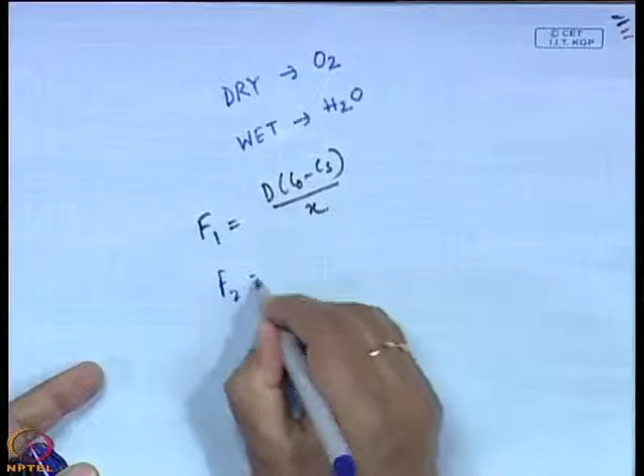So we find that F1 can be written as d times C0 minus Cs by x, and F2 can be written as K into Cs, where Cs is the concentration at the surface of the silicon. K is the surface reaction rate constant for oxidation.

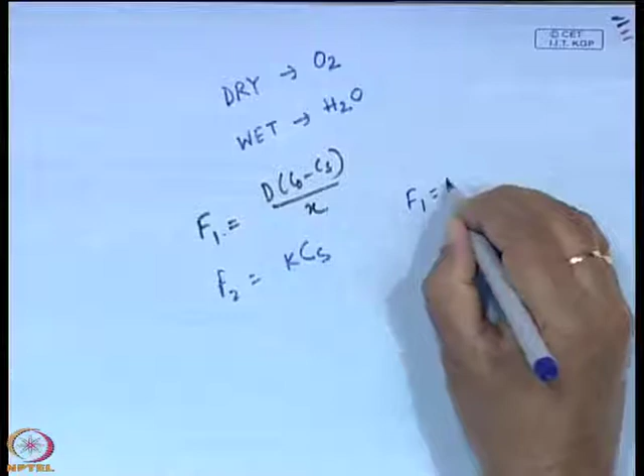At steady state, F1 and F2 will be equal, so F1 equals F2 equals F. If you equate these two equations and solve for Cs in terms of F, then F becomes d C0 by x plus d upon k.

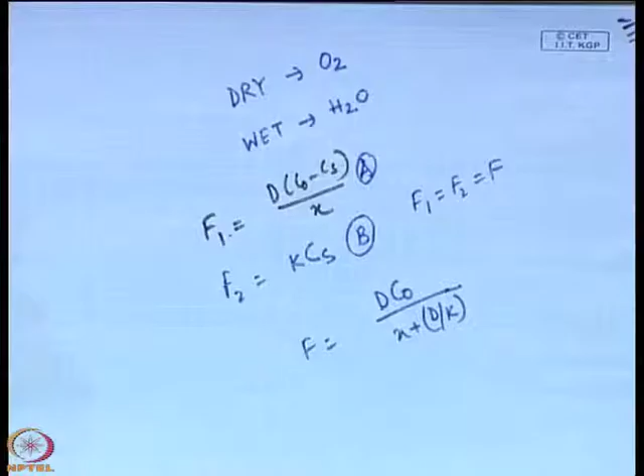So C0 is the initial surface concentration of the oxidizing species, and d is the diffusion coefficient or diffusivity. The reaction of the oxidizing species with silicon forms silicon dioxide. Let C1 be the number of molecules of the oxidizing species in a unit volume of the oxide.

Remember that C1 we have assumed is the number of molecules of the oxidizing species in a unit volume of oxide. We must be interested in the value of C1.

There are 2.2 into 10 to the power 22 silicon dioxide molecules per centimeter cube in the oxide. We add one oxygen molecule to each silicon dioxide molecule, whereas we add 2 water molecules to each silicon dioxide molecule, because one oxygen molecule is diatomic, O2, while in a water molecule only one atom of oxygen is present.

So to make it an oxygen molecule there must be 2 water molecules. So this 2.2 into 10 to the power 22 becomes 4.4 into 10 to the power 22 per centimeter cube if oxidation takes place due to water vapor. So the C1 value for dry oxygen and for wet oxygen is different, it is twice, because of the oxygen diatomicity.

Then the growth rate of the oxide layer, given by dx by dt, equals F by C1, and F equals d into C0 divided by x plus d by k.

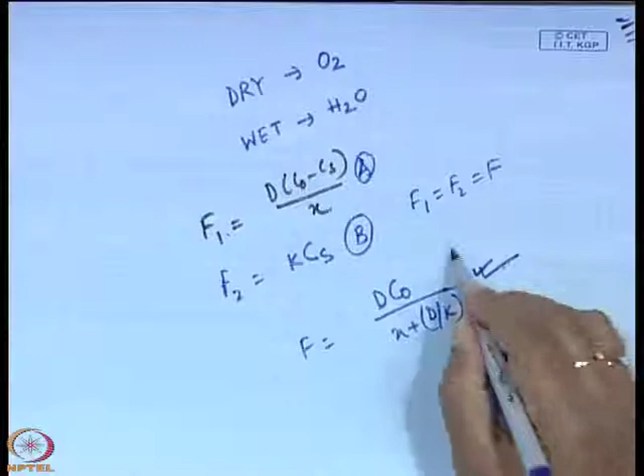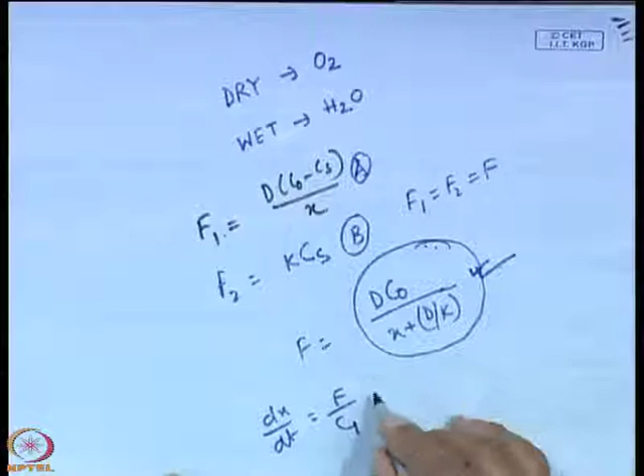So if we put F by C1 here, that is the growth rate dx dt of the oxide layer. What we get is d C0 by C1, divided by x plus d upon k. This is the growth rate of the oxide layer.

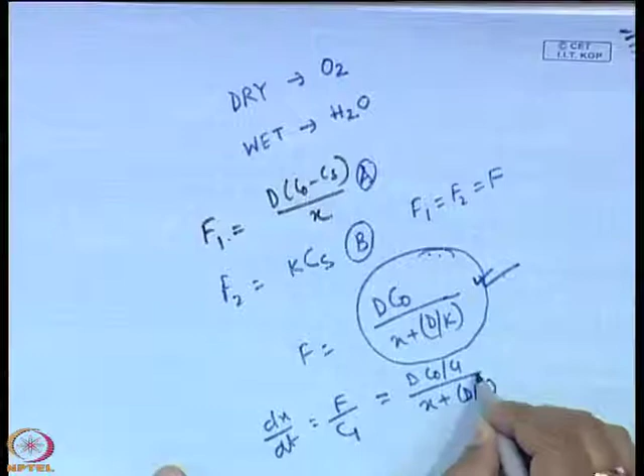The initial boundary condition is that at t equals 0, there is already an initial oxide thickness, as shown here. This can be a result of earlier oxidation or pre-oxidation, and in dry oxide condition we know that already there is an oxide layer formed at the surface of the silicon wafer.

So with this initial condition, where x0 is the initial oxide thickness, we can write x square plus 2d by k into x equals 2d C0 by C1 into t plus tau. Here tau is a time coordinate shift due to the initial oxide layer, represented by x0 square plus twice d small x0 by k, multiplied by C1 by twice d C0.

This equation can be written as x square plus a x equals b into t plus tau, where a equals twice d by k and b equals twice d C0 by C1.

After time t, the oxide thickness can be written as x equals d by k root over of 1 plus twice C0 k square t plus tau by d C1. This is the solution of this equation, where t is the oxidizing time, which can be small or large.

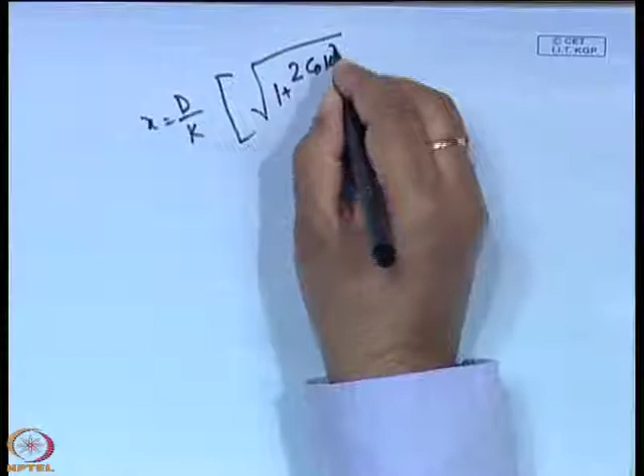For small t, this is the reaction equation: x equals d by k root over of 1 plus twice C0 k square T plus tau by d C1.

Now when t is small, this can be approximated to x is equivalent to C0 k by C1 into t plus tau.

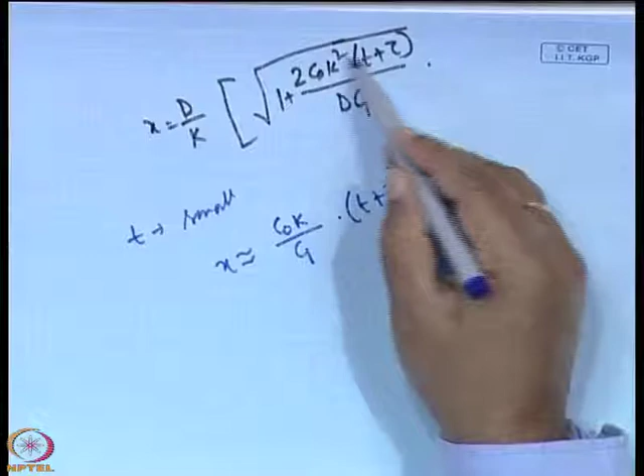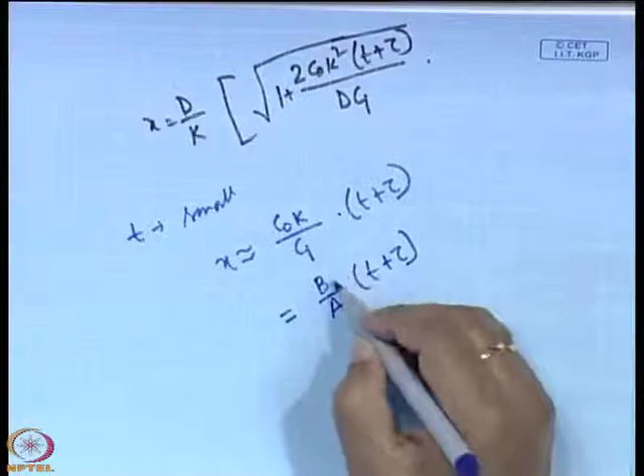How is this approximated? In that case we can consider that the numerator of this fraction is much less than 1, so we can write it in this manner, which equals b by a into t plus tau. This b by a equals C0 k by C1, which follows from the values we assumed for a and b. If you take the ratio of b by a, you will arrive at this expression.

At early stages of oxide growth, surface reaction is the rate limiting factor. The oxide thickness varies linearly with time, and b by a is known as the linear rate constant. So we shall arrive at two types of rate constants: one is the linear rate constant, and another we shall discuss now.

It is for large t, when we shall find that this will vary as the parabolic nature. For larger t, x will be equal to twice d C0 t plus tau by C1, and in this case it will be x squared equals to b t plus tau.

As the oxide layer becomes thicker, the oxidant must diffuse through the oxide layer to react at the silicon dioxide interface, and the reaction becomes diffusion limited. The oxide growth then becomes proportional to the square root of the oxidizing time, which results in a parabolic growth rate. So it is the equation of a parabola, x squared equals to b t plus tau, and this b is known as the parabolic rate constant.

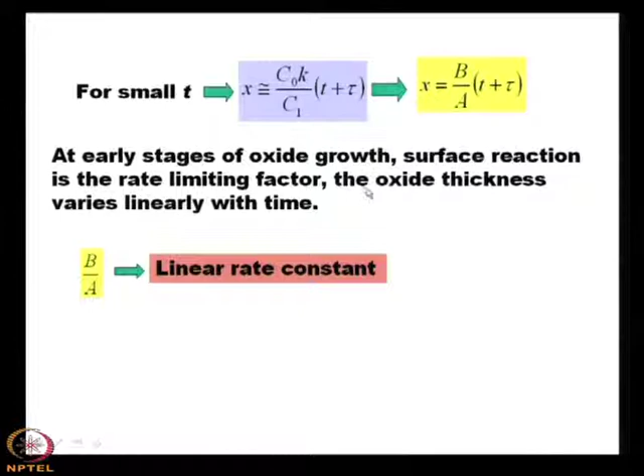Now let us again consider the case of small t and large t to explain what is the linear rate constant and what is the parabolic rate constant. At the onset of oxidation, when it is just starting, the oxidizing species reacts with the semiconducting material. If the semiconducting material is silicon and the oxidizing species is oxygen, then oxygen reacts with silicon, and that is the rate limited case. So it is the surface reaction, and the oxide thickness varies linearly with time.

Now when there is an oxide layer already present, what happens? The oxidizing species must diffuse through the oxide layer to reach the semiconductor surface, and the reaction becomes diffusion limited, and then it becomes proportional to the square root of the oxidizing time. So there are two rate constants: one is the linear rate constant, another is the parabolic rate constant.

For wet oxidation, this d0 is very small and tau is almost equal to 0, and for dry oxidation, the extrapolated value of d0 at t equals 0 is almost 20 nanometer. So at the onset we can assume that a 20 nanometer oxide layer is formed on the surface of the semiconducting wafer for dry oxidation.

Now if we consider the SiO2 structure, what is it about? A silicon atom is surrounded tetrahedrally by 4 oxygen atoms, one, 2, 3 and 4, and the internuclear distance between oxygen and silicon is 1.6 angstrom, and the internuclear distance between oxygen and oxygen is 2.27 angstrom.

So this is the structure, and these tetrahedra are joined together at their corners by oxygen bridges in a number of ways to form the various phases or structures of silicon dioxide. Depending on how the oxygen bridges are formed, the silicon dioxide structures will be different: one type could be the amorphous structure, and another could be the crystalline structure, or quartz. SiO2 is sometimes known as silica, and silica can have two types of crystal structure - crystalline, which is quartz, and amorphous.

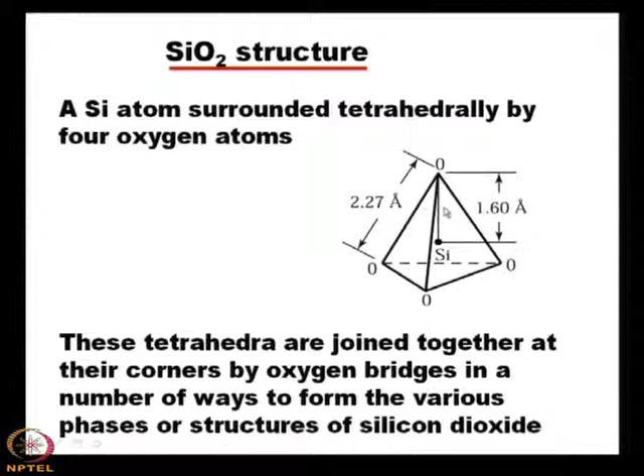Since it is a periodic structure, we can say that it is crystalline in nature. If these tetrahedra are joined together at their corners by oxygen bridges in this manner, then we can say that it is a quartz structure. This silica structure is a quartz structure.

So only 43% space is occupied by SiO2 molecules, and 57% space is not occupied by the SiO2 molecules. So there are many void spaces available in this kind of structure, and predictably the density is 2.21 gram per centimeter cube. If you compare this value of 2.21 gram per centimeter cube, you will find that for crystalline structure it is 2.65. So here the structure is more closely packed than this type of structure, and this is an amorphous structure because there is no periodicity, though there is a tendency.

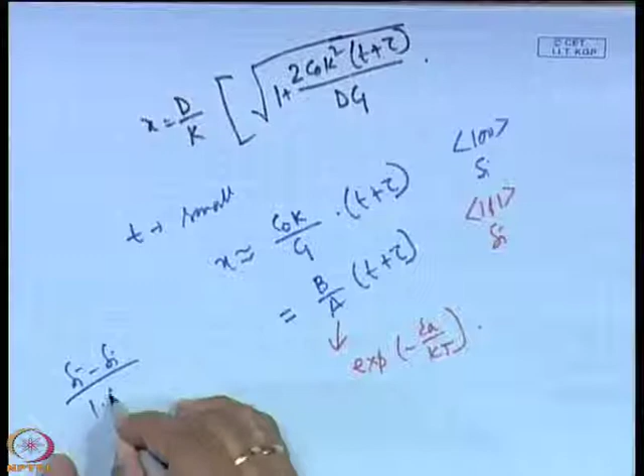So we can see that the activation energy is equal in both cases, meaning these two lines are parallel. Now, this activation energy of 2 electron volt, you can consider it relates to how much energy is required to break a silicon-silicon bond. To break a silicon-silicon bond, the energy required is 1.83 electron volt per molecule. So we can say that this closely matches with the value of the activation energy in case of both the dry and wet oxidation, which is 2 electron volt.

Also, we see that this B by A, the linear rate constant, depends on crystal orientation, in the sense that 100 silicon has a value smaller than 111 silicon. So why does the value differ? Why does it depend on the crystal orientation? This is a very important observation made by investigators for SiO2 thermal oxidation, and it is related to the rate of incorporation of oxygen atoms in silicon.

It is related to the rate of incorporation of oxygen atoms into silicon, which in turn depends on the surface bond structure of silicon atoms. So how much oxygen is incorporated into silicon obviously depends on the surface bond structure.

Now, density of available bonds on the 111 plane is higher than that of the 100 plane. So the linear rate constant for 111 silicon is larger, because the density of available bonds is higher, and obviously the rate constant will be higher in case of 111.

So what we find is that if you have a sample of 111 silicon and 100 silicon, these two samples must have different linear rate constants. For 111 the linear rate constant will be higher than for 100, because for 111 the number of available bonds is higher.

Then what about the parabolic rate constant? This was the temperature dependence of the linear rate constant, and this is the temperature dependence of the parabolic rate constant, B. Quickly we can see that B is twice D C0 by C1, where D is the diffusivity or diffusion constant.

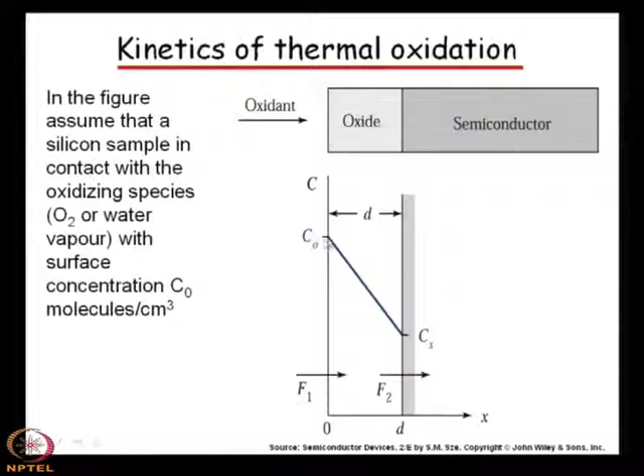What are C0 and C1? C1 is, for dry oxidation, the number of molecules of the oxidizing species in a unit volume, and C0 is the oxidizing species at the surface. So from C0 and C1 we can know what is B, the parabolic rate constant.

The parabolic rate constant's unit is micrometer square per hour, whereas here you see the linear rate constant is in micrometer per hour.

So obviously the parabolic rate constant value will be different, and it also varies as exponential minus E_A by kT, where E_A is the activation energy. As usual, to calculate the activation energy in such a process, we must take help of the Arrhenius plot.

This activation energy, calculated from the Arrhenius plot, is 1.24 for dry oxidation. For dry oxidation oxygen is used, and for wet oxidation water vapor or steam is used. In both cases the pressure maintained is 10 to the power 5 Pascal.

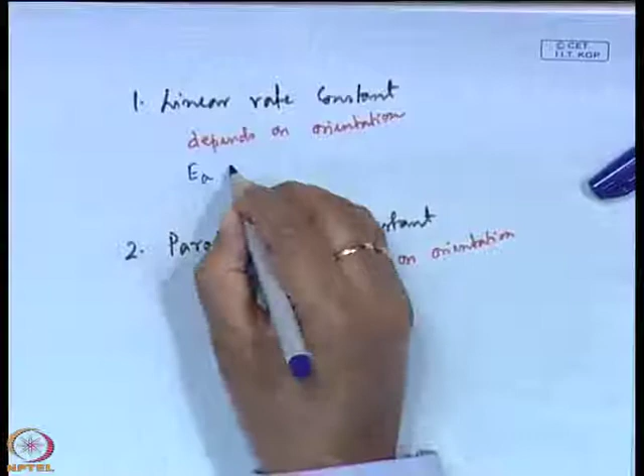Linear rate constant depends on orientation. In linear rate constant, the value of activation energy E A is same for both dry and wet oxidation.

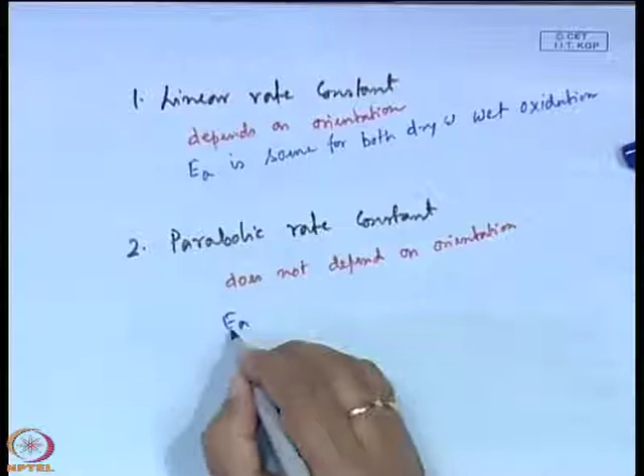Here E A is different for dry and wet oxidation.

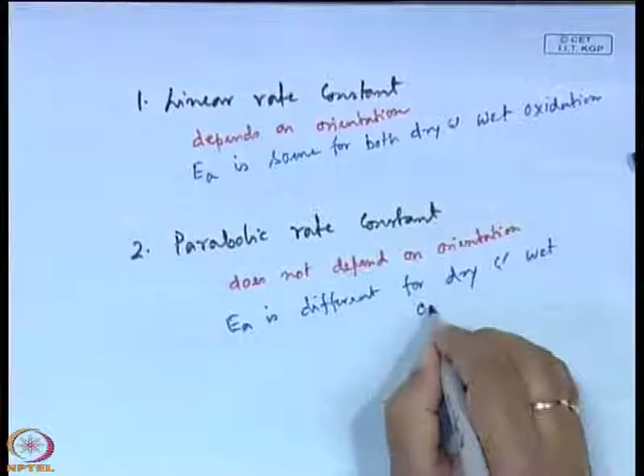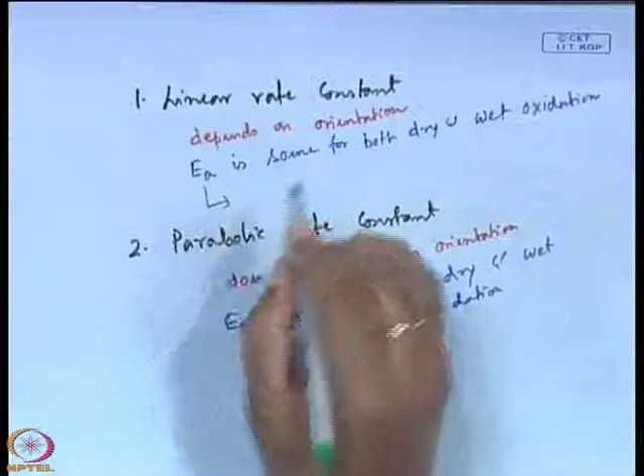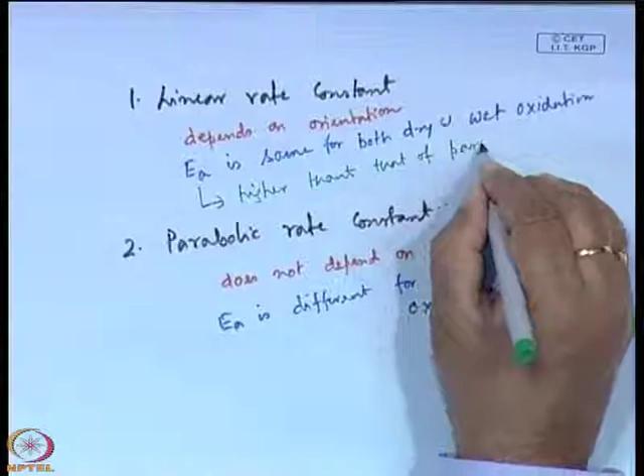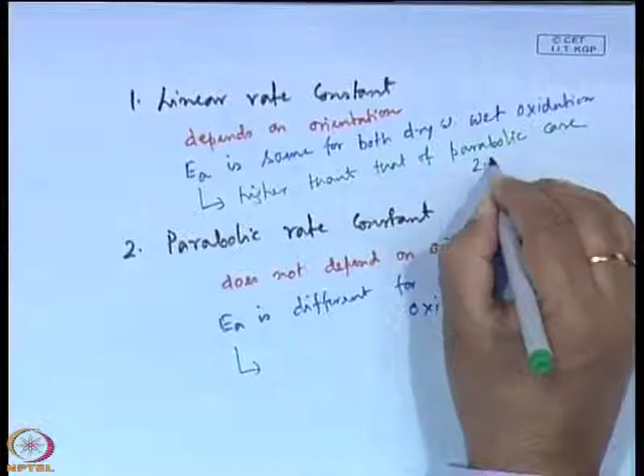The third difference is the value of E A, this value is higher than that of parabolic rate constant, and this is lower than the linear rate constant. It is 2 electron volt, here it is 1.24 electron volt and 0.71 electron volt.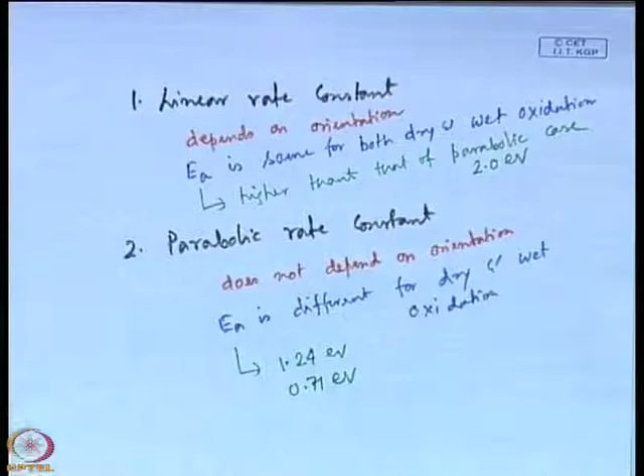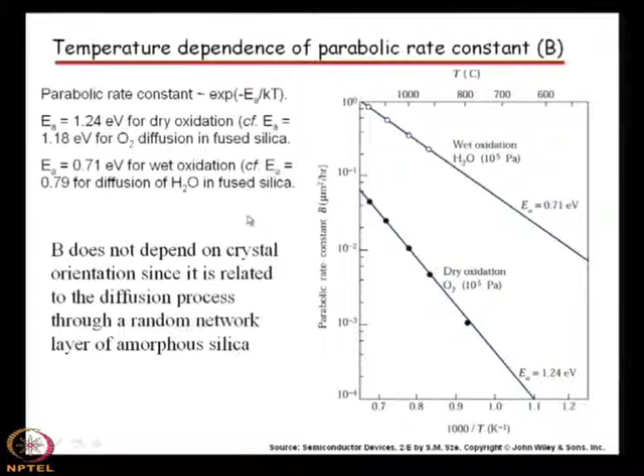So ultimately the activation energy is basically the process of diffusion, and for the parabolic rate constant, it is the process of diffusion through fused silica, either oxygen or water vapor. In case of linear rate constant, it is the reaction at the silicon surface with the oxygen and the energy required to break the silicon bonds. So the mechanism is different, it is well understood now.

Now some comments about thermal oxidation: the oxides grown in dry oxygen have the best electrical properties. More time is required to grow the same oxide thickness at a given temperature in dry oxygen than in water vapor.

So dry oxidation is a very slow process, and if you want to grow say 50 nanometer or 20 nanometer oxide layer by dry oxygen, if the time required using dry oxidation is T1 and that using water vapor is T2, for the same thickness, say x nanometer, to grow either by dry oxidation or by wet oxidation, the time required is T1 and T2, and obviously T1 must be greater than T2.

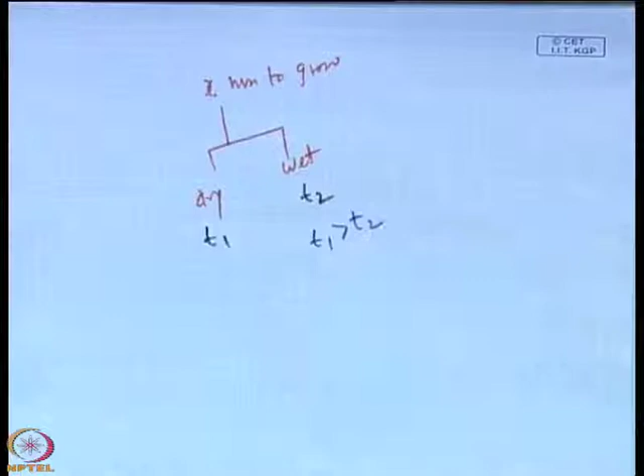So more time is required to grow the same oxide thickness at a given temperature in dry oxygen than in water vapor, and thin oxide is grown by dry oxidation. Thin oxide means gate oxide in MOSFET, whose value is less than or equal to 20 nanometer, or thicker oxides, say field oxides in MOS integrated circuits, greater than 20 nanometer. For bipolar devices where thicker oxides are required, oxidation in water vapor or steam is used.

So the limiting factor, or the factor that must be chosen for growing the thin oxide or thicker oxide, is the thickness of the oxide layer. If it is less than 20 nanometer, one should go for the thin oxide, or if it is greater than or equal to 20 nanometer, one should go for thicker oxides, and thicker oxides are grown using water vapor.

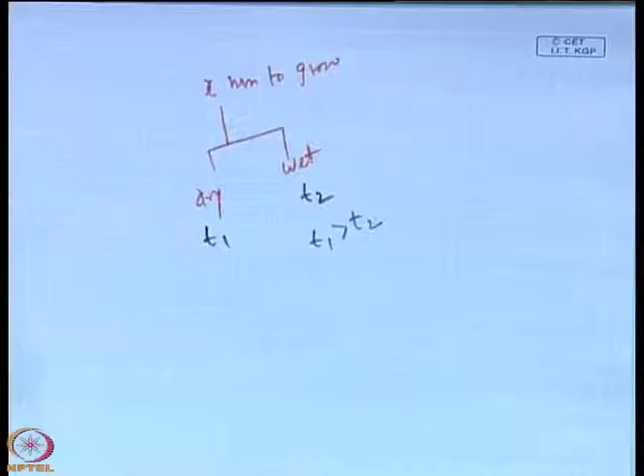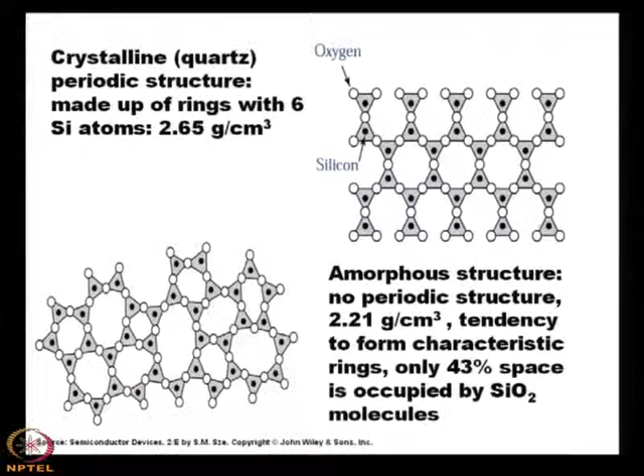So now with this idea we can say that for 20 nanometer we can use the dry oxidation process, and for greater than 20 nanometer we can use the thicker oxides, which is the result of the water vapor used.

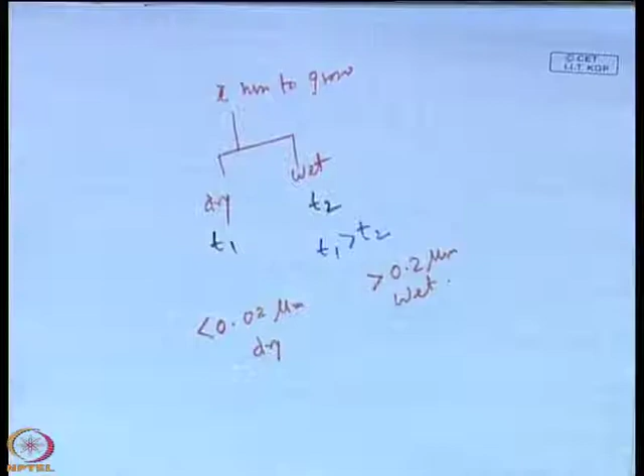What is the thickness for 900 degree centigrade growth? We see it is 0.01, so it is less than 0.02 micron at 1 hour in case of dry oxidation. Here for 1 hour it is greater than 0.2 micron for wet oxidation. So we can say it is 5 to 10 times thicker than that by dry oxidation.

However, this thick layer is electrically not the best one. Dry oxygen oxides grown in dry oxygen have the best electrical properties.

Another important thing from these studies is that for thin oxide, to grow with precise control over thickness, slow growth rate is important. Slow growth rate is important where one can precisely control the thickness.

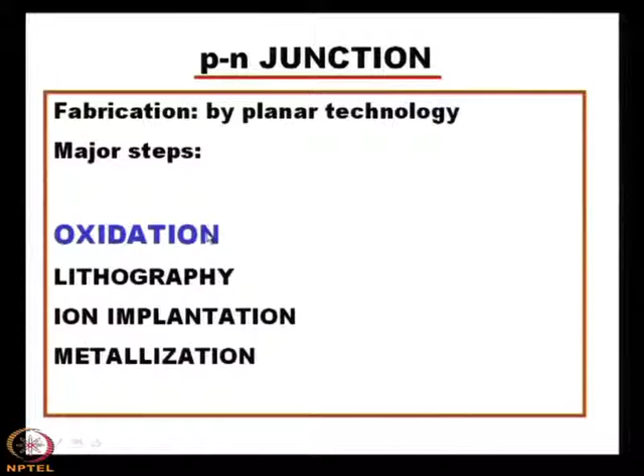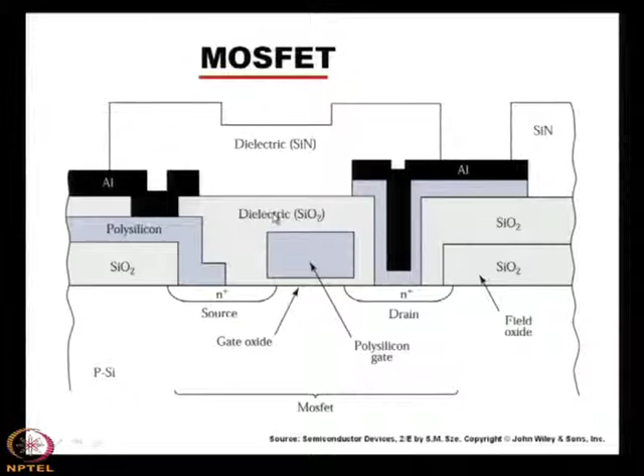In process technology, oxidation is one of the process steps in planar technology, and we see that oxidation is the first one, followed by lithography, ion implantation, metallization, etc. In this oxidation step, very good quality gate oxide is required, otherwise the leakage current will increase like anything, and because leakage current increases, interface states will be more. So gate oxide must have good electrical property, and this can be achieved if we use oxide grown by the dry oxygen method. So that is an important consideration in case of oxidation.

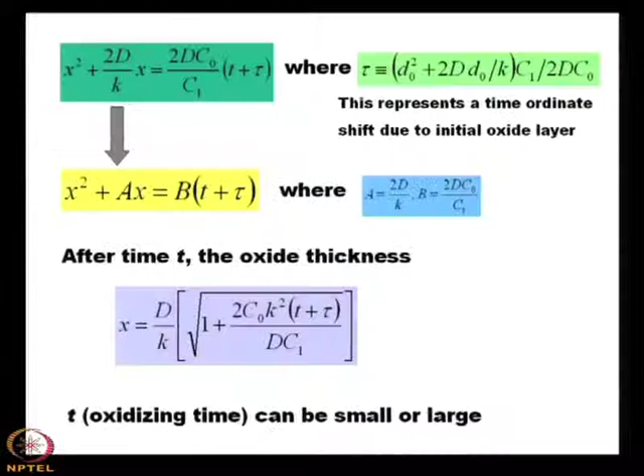This is thermal oxidation, because we shall come across other oxidations also, like CVD of silicon, or other types of oxidation. We shall find there are other applications also, not only for making gate oxide, but in some cases for isolation, and in some cases for making a mask for diffusion or lithographic pattern, where thick oxide layers are grown. In that case we will not use dry oxidation, rather we shall go for wet oxidation or oxidation by the CVD technique or other techniques that we shall discuss later.

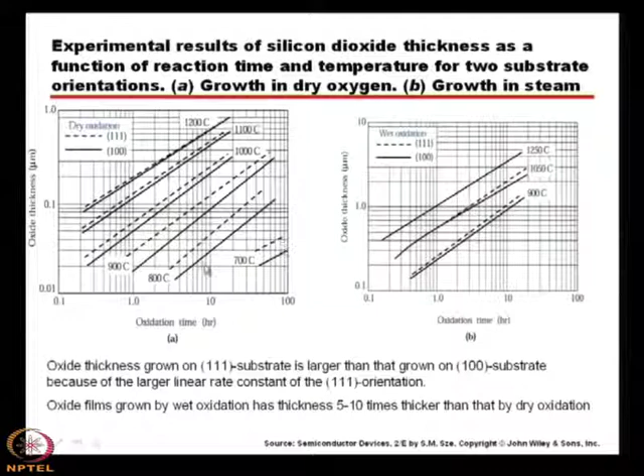So control is very important, precise control is important, and the growth rate must be slow enough. What are the major steps that industry has taken? The protocols are: one is growth in dry oxygen at atmospheric pressure and lower temperatures, meaning 800-900 degree centigrade, atmospheric pressure and low temperature. This is dry. Another protocol can be growth at pressure lower than atmospheric pressure.

So then it becomes more slow at atmospheric pressure and lower than atmospheric pressure, the rate will be less. Growth in reduced partial pressures of oxygen by using a diluent inert gas. The inert gas can be nitrogen, argon or helium together with gas containing the oxidizing species. So that means we can reduce the partial pressure. How do we reduce it? We can use some inert gas to dilute it - argon, nitrogen or helium. Then if it is grown by reduced partial pressure, the growth rate will be very slow.

Another process that can be used is composite oxide films, with the gate oxide films consisting of a layer of thermally grown SiO2 and an overlayer of CVD SiO2, meaning silicon dioxide made by chemical vapor deposition. So these are the processes that can be used.

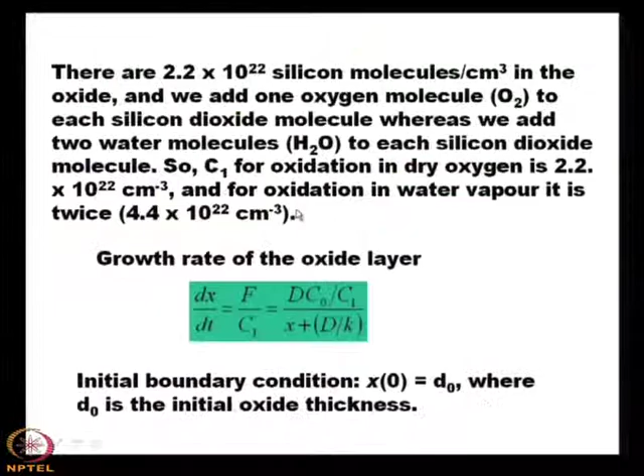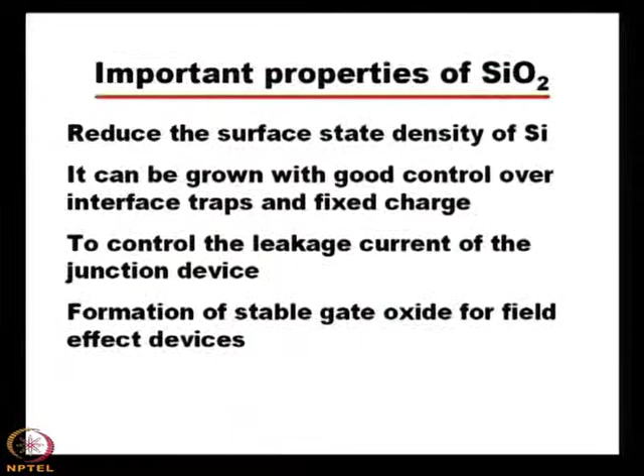So this is the standard protocol we have used, and this must be accompanied by the clean room, because without a clean room one cannot make this oxidation very good. Otherwise there will be a large number of dust particles that will have their own imprint or signature on the surfaces or on the wafer surfaces in a later stage.

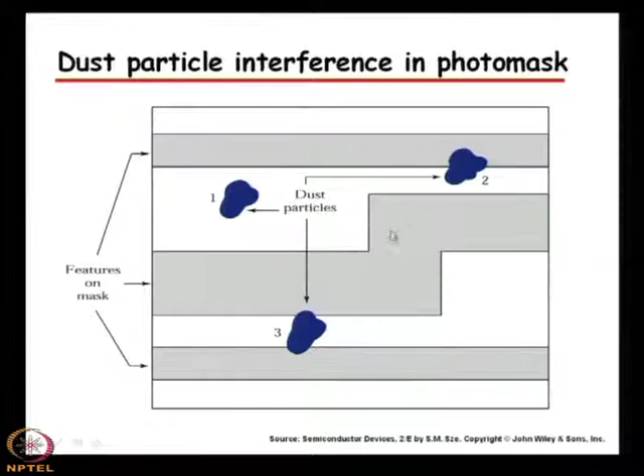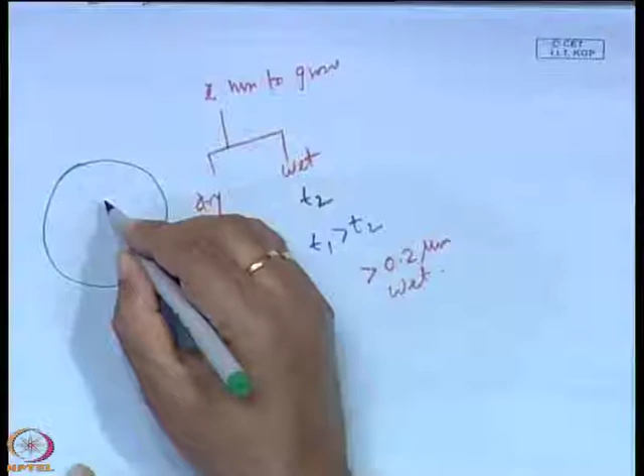So what we see is that these oxides are grown at the furnace, which can be a vertical one. Vertical oxidation furnace can grow reproducible high quality 10 nanometer oxides to within 0.1 nanometer across the wafer. So if you have a wafer of say 6 inches, the growth of oxide layers can be 10 nanometers plus or minus 0.1 nanometer. So that is very precise.

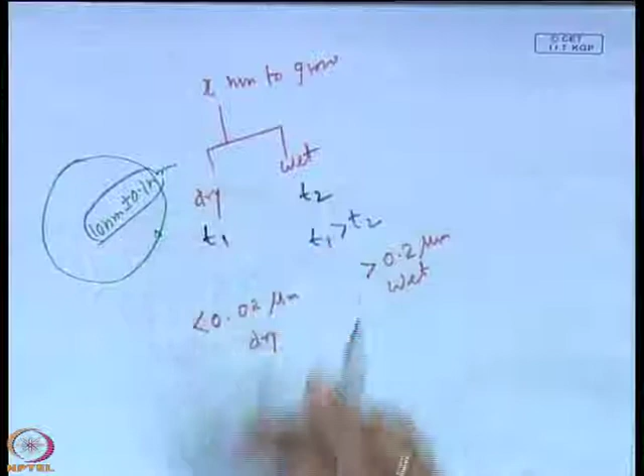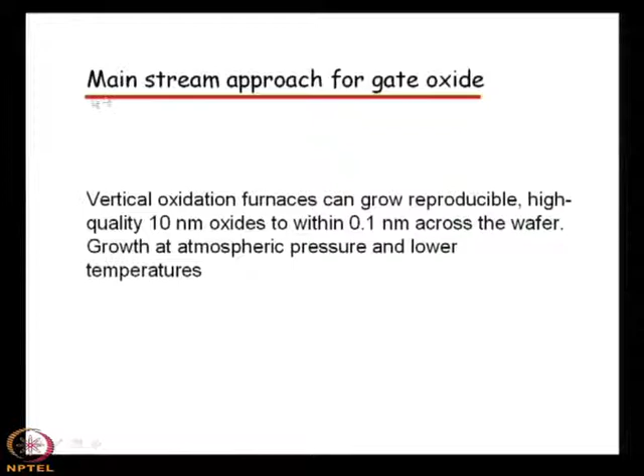And this 10 nanometer oxide is used in case of the gate oxide in MOS technology, also grown at atmospheric pressure and at lower temperatures. So that is the mainstream approach for gate oxide, which has been done in the industry.

So now we see that the vertical furnace is the most efficient furnace compared to the horizontal one. At normal atmospheric pressure - that means 76 centimeters of mercury - and at low temperature, meaning 800-900 degree centigrade, it becomes a slow process, so thermal shock is not there, and at one go a large number of silicon wafers can be made to oxidize. These are the advantages, so the vertical furnace has its own efficiency.

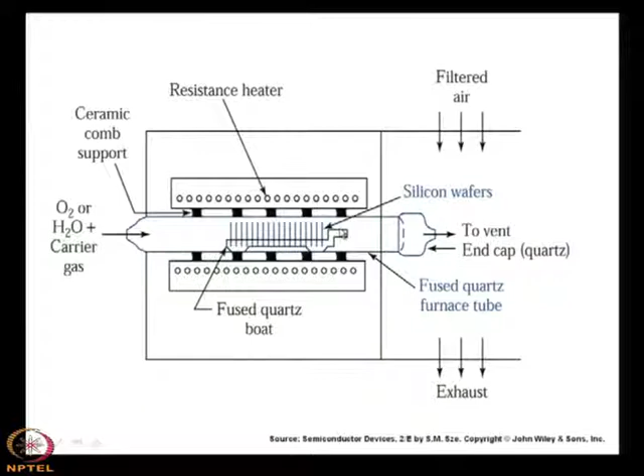So now till now what we have discussed is that oxidation can be a dry one. This is a dry one, and you see that first there is a silicon dioxide interface, and that moves into silicon during oxidation. First the silicon dioxide interface forms and it moves, so more and more silicon is consumed for the formation of SiO2. One example you can try to solve: if a silicon dioxide layer of thickness x is grown by thermal oxidation, what is the thickness of silicon being consumed?

You can try this example to see what happens, and you will find that the silicon dioxide interface moves into the silicon during oxidation and more silicon is consumed. This is very interesting, because once the SiO2 is grown, the oxidizing species must diffuse through the grown SiO2 to reach the interface between Si and SiO2, to react with the silicon atoms for the growth of SiO2.

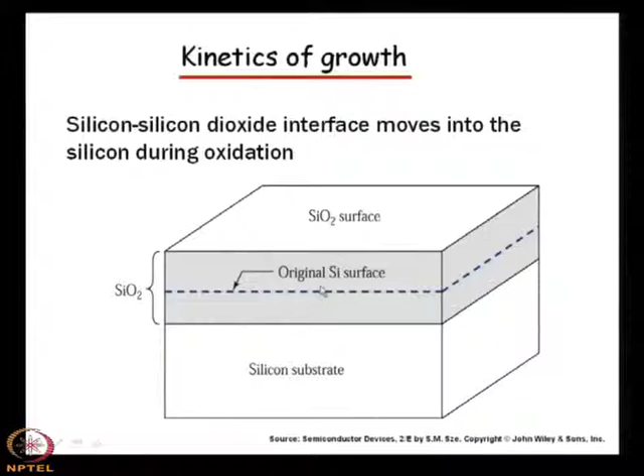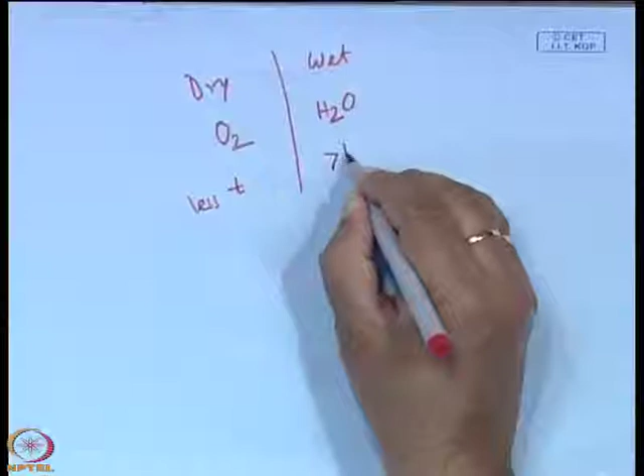So now we can summarize our lecture: oxidation can be of two types, dry oxidation and wet oxidation. In dry oxidation, oxygen gas is used, whereas for wet oxidation, H2O vapor, that is water vapor or steam, is used. We have seen that for dry oxidation, the thickness T is less, while for wet oxidation it is greater than T for dry, under the same conditions.

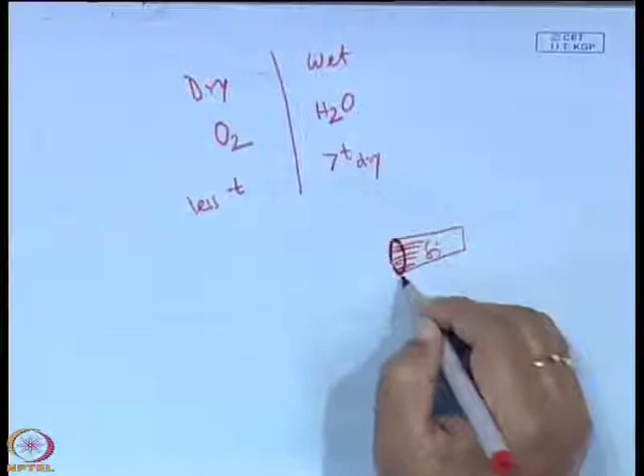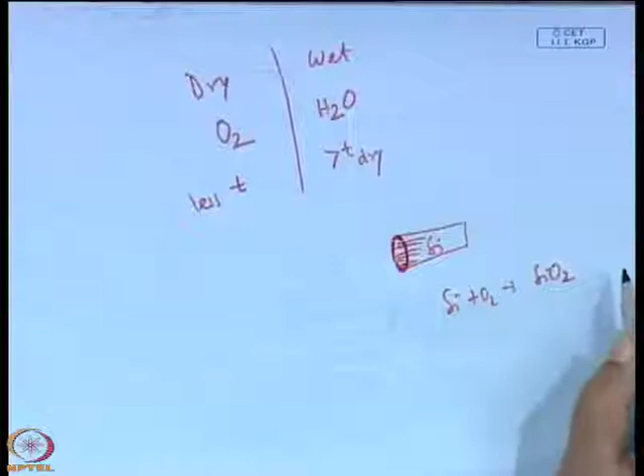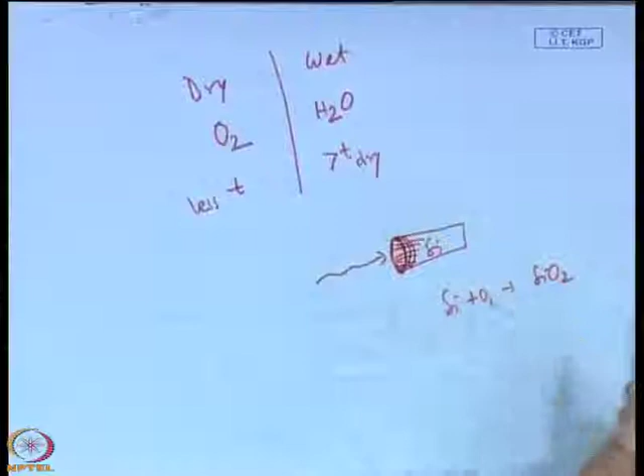We have also seen that the kinetics of growth is such that first a layer of SiO2 is formed on the silicon, and this Si-SiO2 interface moves. The rate limiting factor that affects the reaction of Si with oxygen to form SiO2 is linear in nature, and the rate constant depends linearly on this. Then the oxidizing species diffuses through the SiO2 layer to reach the interface for reaction, so it follows a parabolic rate constant.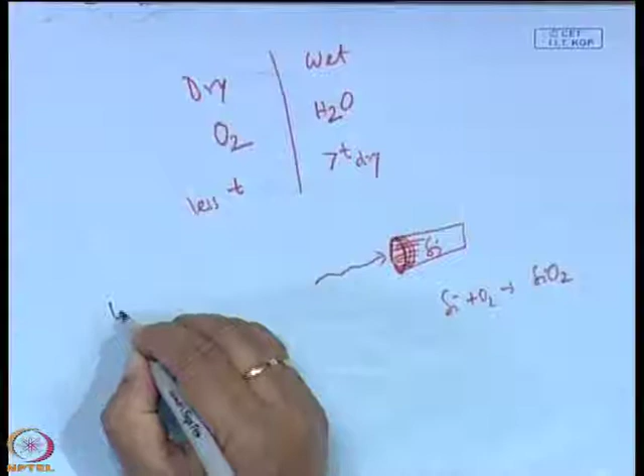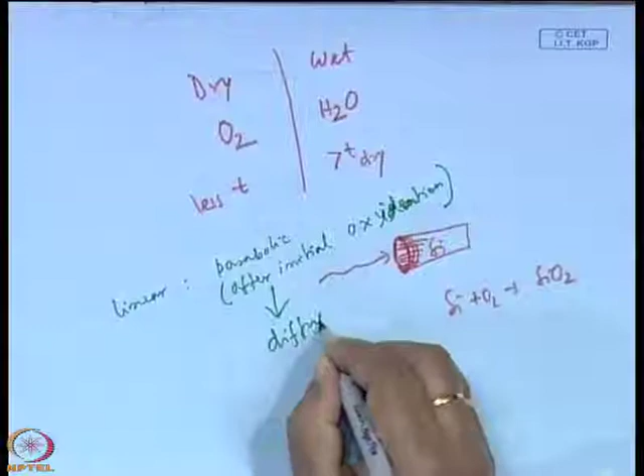So depending on these models, one is the linear rate constant, and it is different from the parabolic rate constant after the initial oxidation. This occurs after initial oxidation, because diffusion takes place through this initial oxide layer.

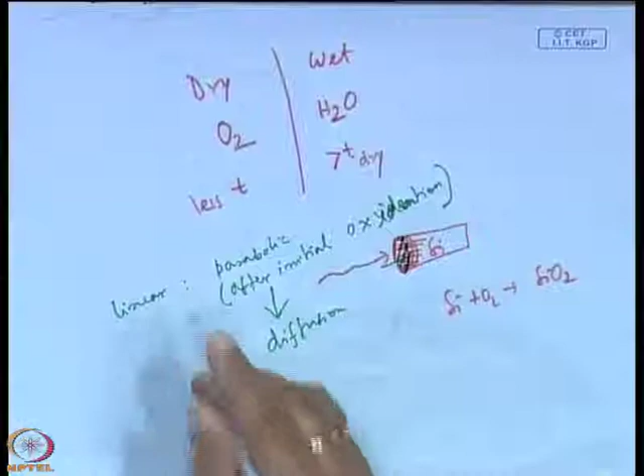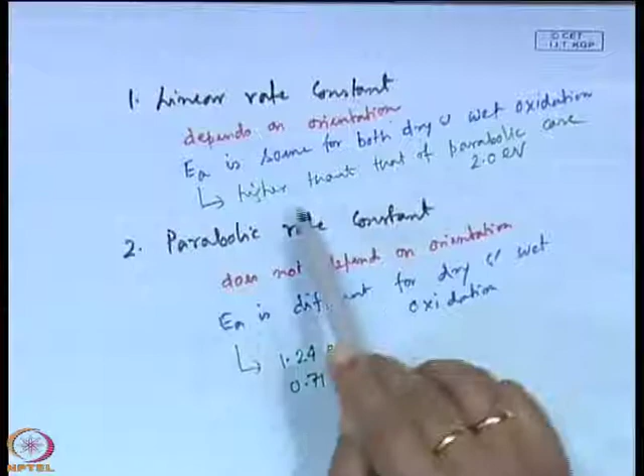The linear rate constant depends very much on the orientation of the crystal, as we discussed, whereas the parabolic rate constant does not depend on orientation. The activation energy for the linear rate constant is the same for both dry and wet oxidation. For the parabolic rate constant, the activation energy is different for dry and wet oxidation. Also, the activation energy for the linear rate constant is higher, about 2 electron volts, because this is the energy required to break the silicon bond, whereas for the parabolic rate constant it is only for diffusion.

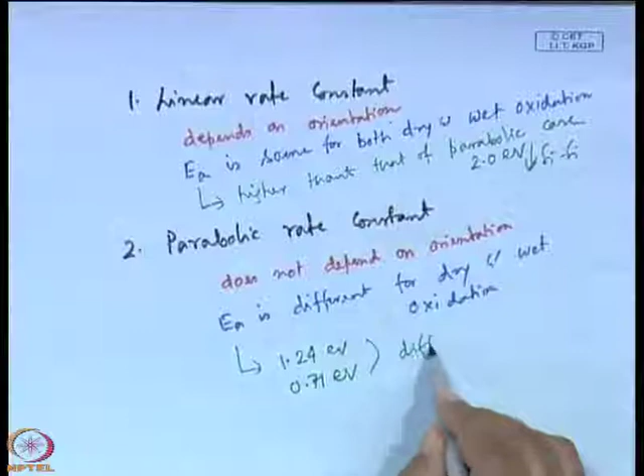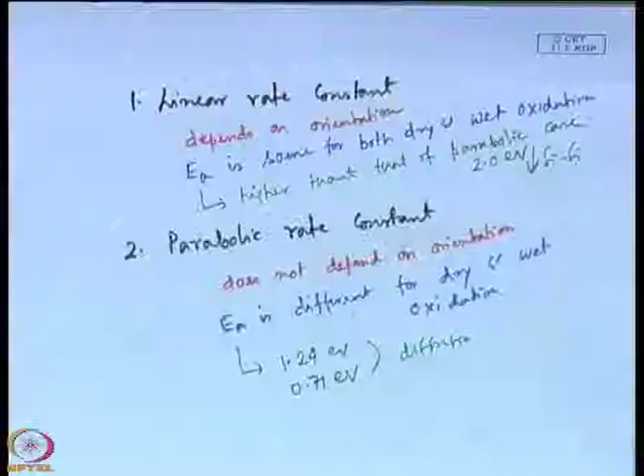Then we discussed the different structures of SiO2: one can be quartz type, another amorphous type. We have seen that the density of the quartz structure is greater, with a high packing fraction. This is because it has a periodic nature, the silicon atoms form a ring of 6 atoms, and it is perfectly crystalline, perfectly periodic.

For the amorphous type crystal structure of SiO2, the density is much less, because less than 50% of the space is used by the SiO2 molecules. So impurities, particularly sodium or that type of impurity, can diffuse through the SiO2. This must be taken care of.

Then we talked about a mathematical problem: given the silicon layer thickness to grow an SiO2 layer thickness x, how much silicon is being consumed.

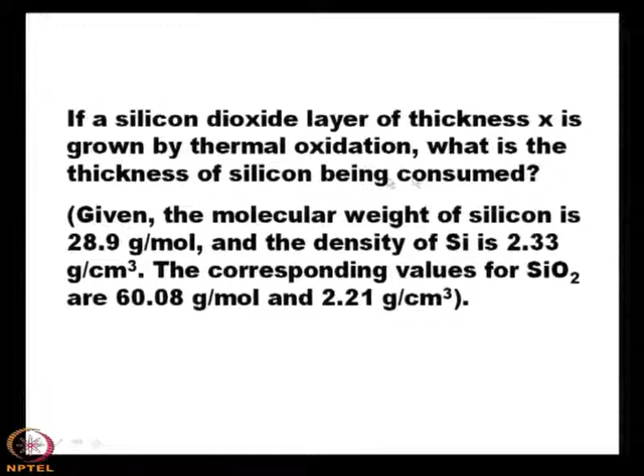With this we end the discussion on oxidation. We have discussed that it is one of the most important processes, as the gate oxide under which a conducting channel can be formed between source and drain, and the field oxide which provides isolation from other devices; both these oxides are formed mainly by thermal oxidation. Next day we shall discuss the dielectric layers, polycrystalline silicon, and metal film. Thank you.